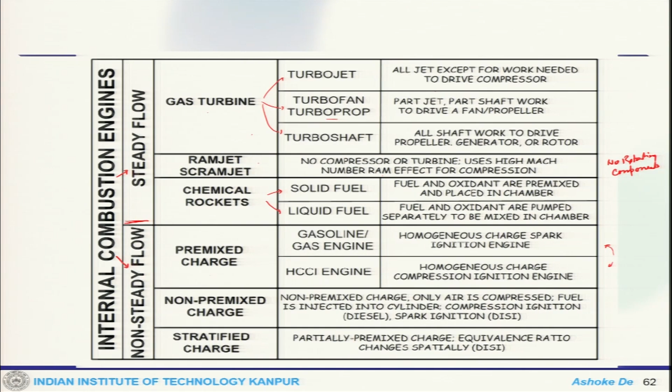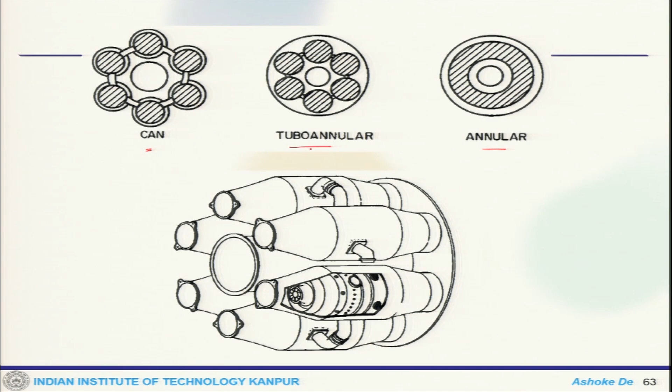That's pretty much the internal system—you can classify and look at what you practically see in daily applications. We also talked about combustors used in GT applications, which could be can type, annular type, or tubo-annular type. This is another schematic of a multiple-can configuration.

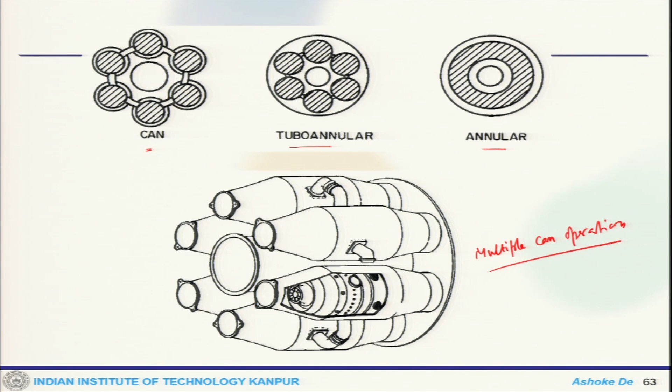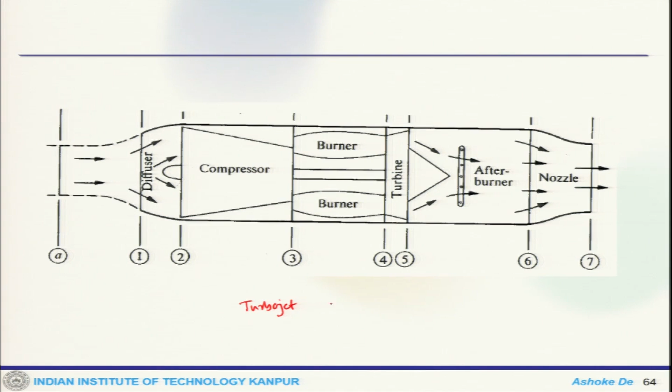Here you see can numbers 1, 2, 3, 4, 5—this is a multiple-can operation, and they take part in the power generation or thrust generation process. This is another schematic, a cut section of the engine with an afterburner—this is a turbojet engine with an afterburner.

So, there you see the difference here. Typically air comes through the diffuser, then the compressor, then goes through the combustion chamber or burner, then you pass through the turbine where the expansion takes place, and after that you have the afterburner, which is a second level of combustor, where you add more fuel. Once you add more fuel there, you have extra burning taking place to generate

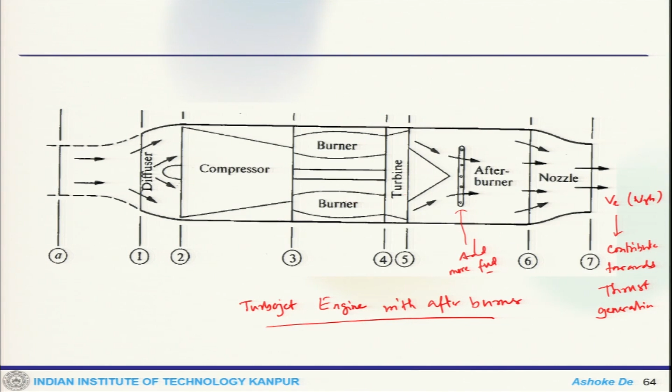more power, and then finally you pass through the nozzle, so that the area reduction produces the high exit velocity. This is quite high, which essentially contributes towards thrust generation. So that is how it works. Some of these things we have already discussed, just to show you schematically how they look. Now, once you put down the combustion in gas turbine, you can have

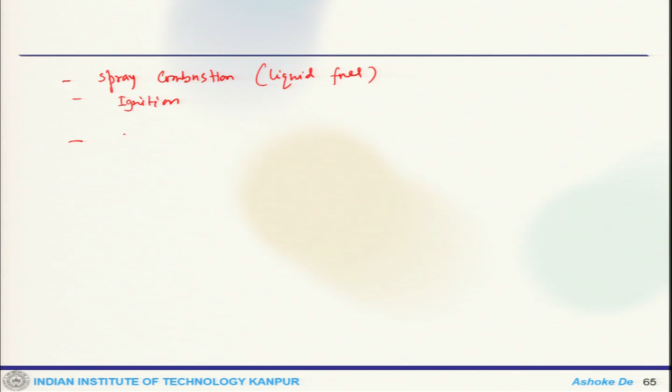other aspects of it, like spray combustion, because your fuel is liquid. So this is for liquid fuel, spray combustion. Then you have ignition, which is another important aspect, because without ignition the fuel will not ignite. One more important thing is stability, that is your flame stability. This is quite important in the gas turbine engine, especially in aircraft applications, because flame stability is very, very important.

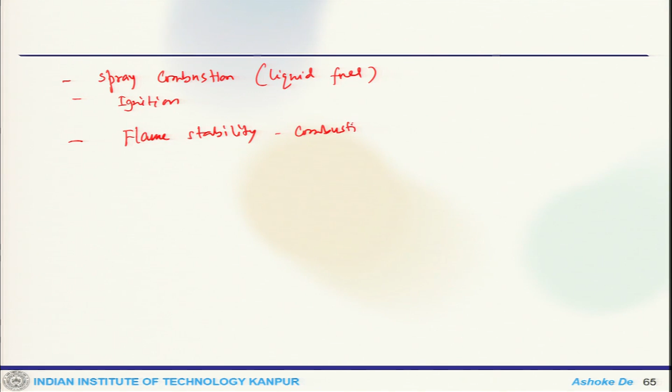You cannot at any given point of time allow your flame to shut off, because then the engine will go off and there would be a huge problem. So to avoid that issue, in aircraft applications there is a pilot flame sitting there which acts as an igniter. Now this is for combustion noise. Then you have flame propagation,

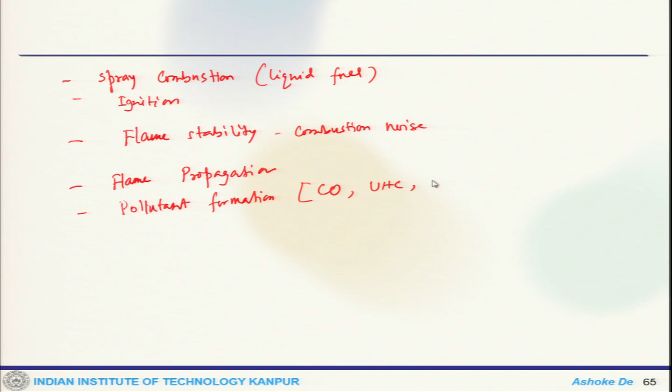and obviously there are issues like emission. So pollutant formation, which are CO, UHC, NOx, soot, etc. These are obvious because we have done quite a bit of discussion on this, because you are burning liquid fuel of the CxHy category, hydrocarbon fuel. Once you burn hydrocarbon fuels, soot, UHC, CO are obvious.

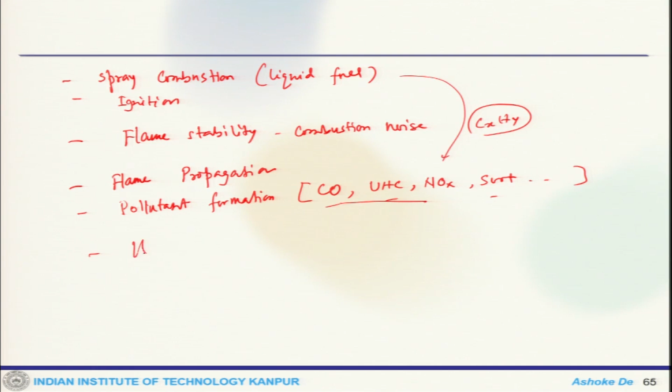Then heat transfer is another important aspect, because all your combustor walls are exposed to high temperature. So there will be huge thermal loading along with the liners. So heat transfer, and then cooling. Cooling of not only the combustor, but of the turbine blade also. So it is both combustor and turbine.

We need to look at the cooling aspect, because turbine blade cooling is an important area of work which people have been working on for a few decades, coming up with new suggestions or designs to improve the cooling, and this cooling has a lot of effect on the durability of these blades. Without cooling, the blades will fail very quickly, which one cannot afford, because the turbine is one of the key components of this whole business,

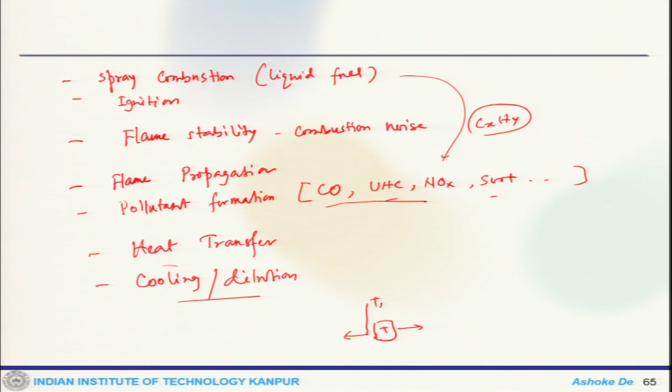because the turbine generates the power, but it also dictates the design both upstream and downstream, because the turbine will dictate the maximum temperature, T max. That will dictate your combustion chamber design. Then in the combustion chamber there would be not only pressure and temperature but also delta P across it, which will drive your compressor design. Also the turbine powers the compressor, and a fan if there is one, and then the exhaust passes through the nozzle.

So in GT application, this is one of the key components which actively takes part in the design process, because it dictates both the upstream and downstream design. That's why the T max in the turbine is controlled by the turbine blade, because its material has a limit for T max, what it can withstand. So this T max comes from the material perspective, and that's why one has to cool down that material so that failure does not occur.

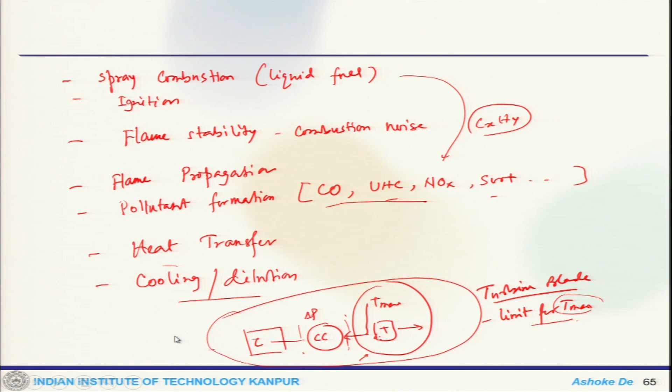So you can see in a bigger picture how that dictates the whole business. Now some problems in GT application. Some of them are still existing problems, some of them are quite well handled. For example, NOx control is still a problem, one has to actively look at it, and the GT industry does, but obviously NOx is not decoupled from

another issue, CO or UHC, because the behavior of CO and UHC is slightly different compared to NOx. That is why some level of trade-off is required, because for NOx, if it is not fuel bound, the temperature in the post-flame region makes thermal NOx formation quite active, and that is what dominates.

But then at the same time, if your temperature is high, CO completely gets oxidized, so that helps. But if you go to low temperature, NOx could be low, but at the same time CO could be quite high. So it's basically a trade-off situation: on one hand this goes up, this comes down; on the other hand it goes down, it goes up. So it's a balancing act between these two.

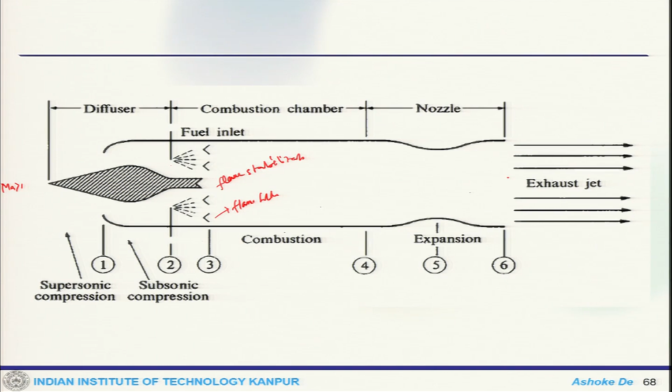Each fuel has its own different calorific value. So that will tell you what kind of fuel one can use at this speed so that the flame stabilization is very effective. So that's an area which requires a lot of attention. Then finally it passes through the nozzle.

Now when you come to the rocket application, or rather I would say chemical rockets, you have two categories. One is the liquid fuel rocket. Here we have already said that fuel and oxidizer are stored separately, in thin walled tanks at low pressure. So your fuel and oxidizer are stored in a thin walled, low pressure tank.

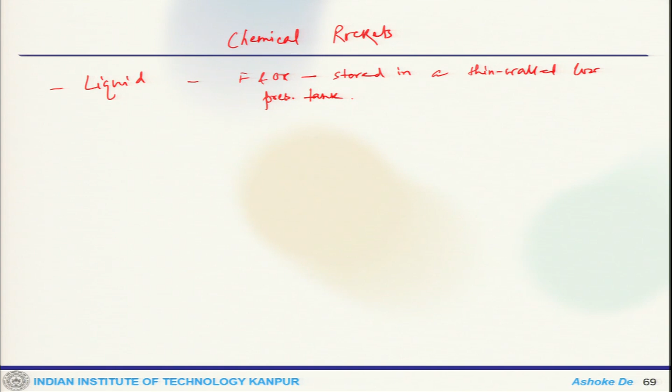Okay. So the turbine driven pump actually pumps them to the combustion chamber, and there the burning takes place at high pressure. So that is how it works.

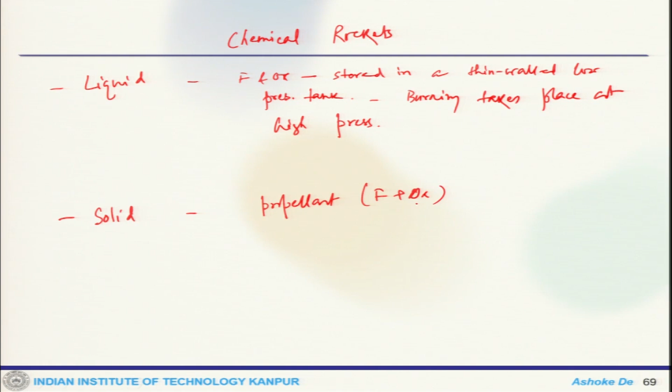Then the other one is the solid fuel system, where the entire block of the propellant, that is both fuel and oxidizer, is stored within the combustion chamber. So now combustion actually proceeds from the surface of the propellant grain.

So one can note that combustion proceeds from the surface of the propellant grain at a given rate that depends on pressure and temperature. And this combustion rate will be impacted by the pressure, temperature, and also the geometry of the grain.

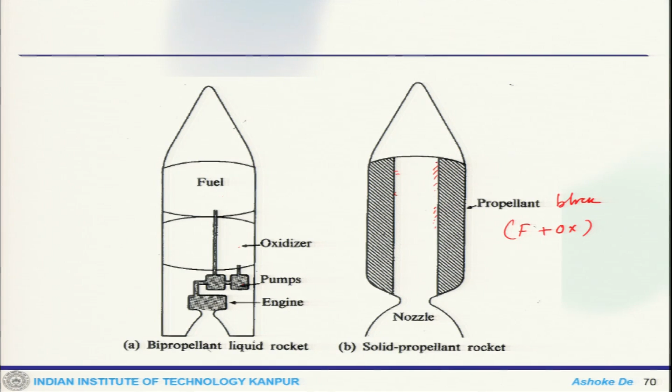So this is the engine, and then finally it passes through this nozzle where it generates that huge amount of thrust. And when you look at the solid, this is the total propellant block, where fuel plus oxidizer are already premixed. They are sitting within the combustion chamber and the reaction starts from this surface, and this reaction rate depends on

pressure and temperature, and specifically the geometry of the propellant grain, because the geometry has a huge impact on how this combustion will proceed and what the rate will be. But again here the issue is that with solid propellant, control is not very easy, because it is already within the combustion chamber, and once it ignites, the control of the propellant is not that easy.

Whereas with the liquid one, the fuel and oxidizer are injected separately into the system through the turbine driven pump mechanism, so to some extent you can control the flow of the fuel or oxidizer, but no such mechanism exists in the solid case. Once it is ignited, it is a self sustaining system which will keep on burning this propellant.

So, the control is not that easy, and on top of that, it can lead to instability. So, combustion instability in solid propellant rockets is quite common, because things are not that controlled.